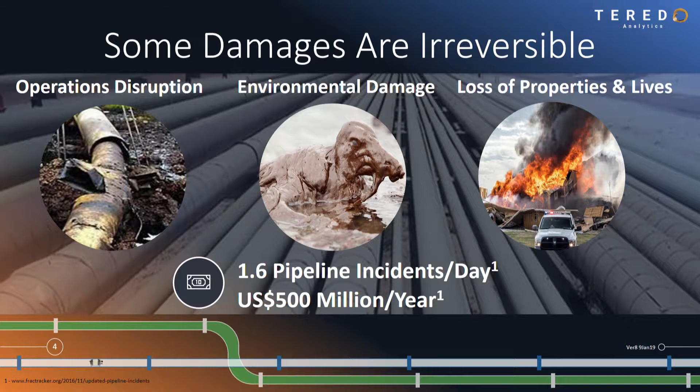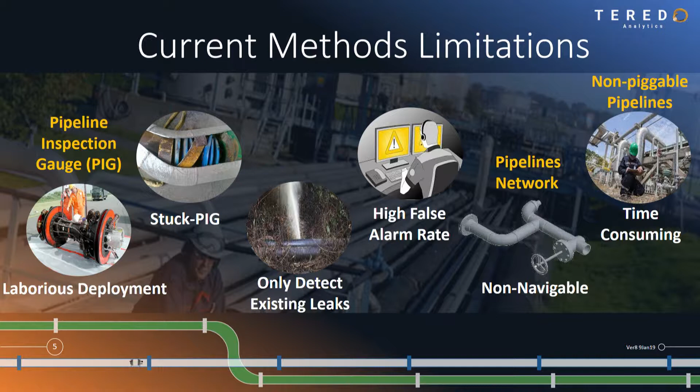As for non-piggable pipelines, which are small diameter pipelines, a safety inspector is tasked to walk along the entire length of the pipeline, which can be extremely time-consuming.

Now, the Teredo Observer serves to address all these current issues. Firstly, it is modularly designed for easy change of sensors to meet the customer's different requirements. In addition, different length arms can be attached to the Observer, so that it can traverse different pipeline diameters.

And once inside the pipeline, it can detect pipeline conditions using its onboard sensors. And lastly, of course, it can be pre-programmed to navigate to a designated pipeline for inspection. Now let's look at the operational capability of our Observer.

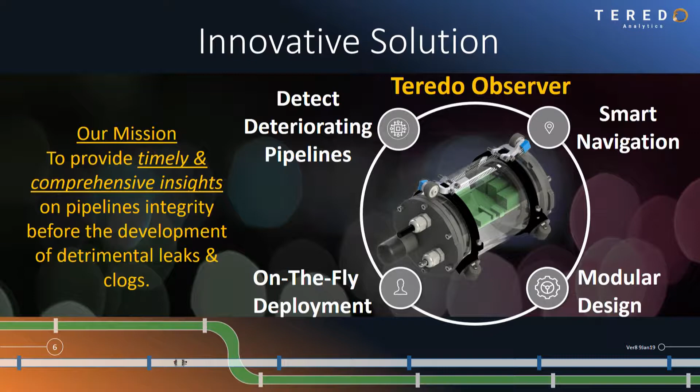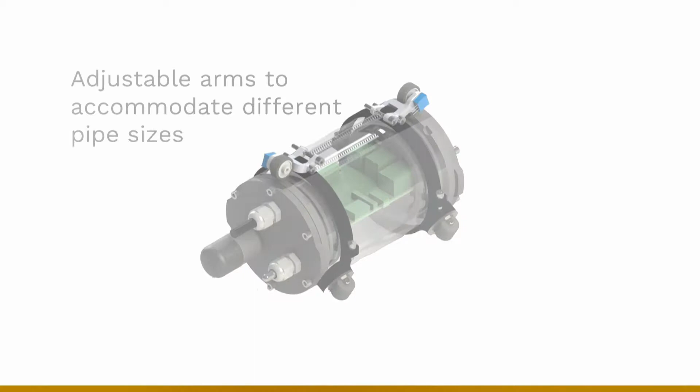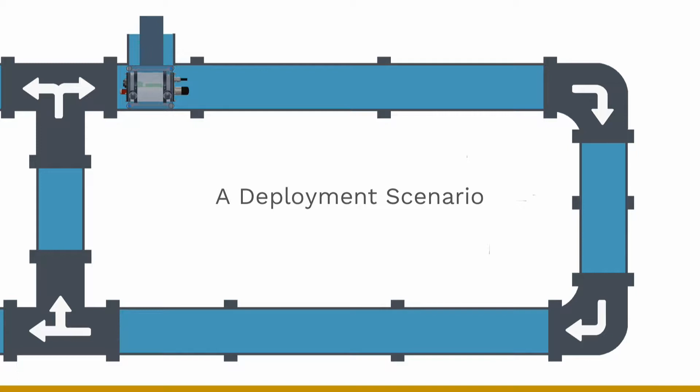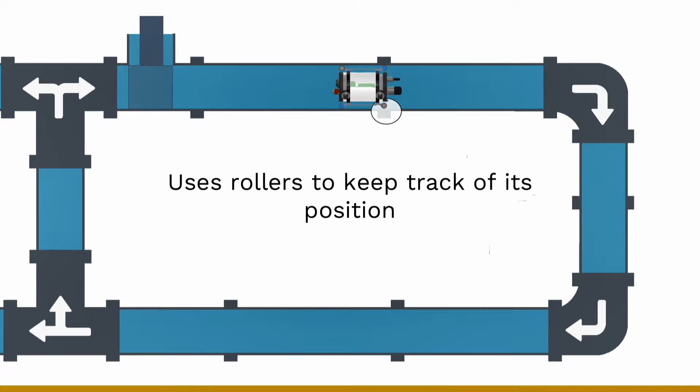Our device has adjustable arms to accommodate different pipe sizes. It also has the flexibility to attach different sensors to measure acoustics, pressure, and visual data. In a typical deployment scenario, the docking station receives the signal to release the device for pipeline inspection. During this pipeline inspection, the device tracks itself using the rollers installed onto it.

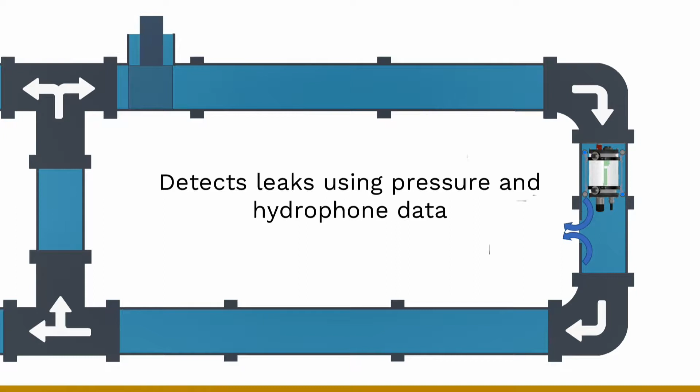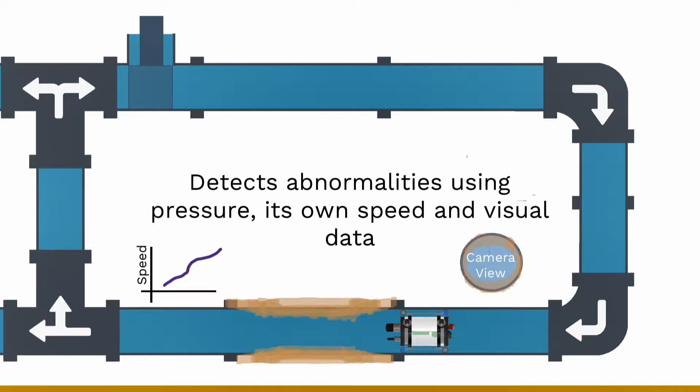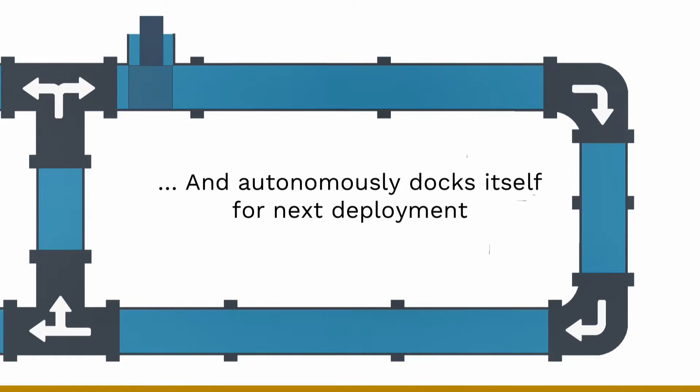Our device is also capable of detecting leaks using the pressure and hydrophone data it collects while traversing. It is also capable of detecting abnormalities using pressure, its own speed, as well as the visual information. Now, one of the unique features of our device is that it can autonomously travel to the designated pipes, and at the end of it, autonomously dock itself for the next deployment.

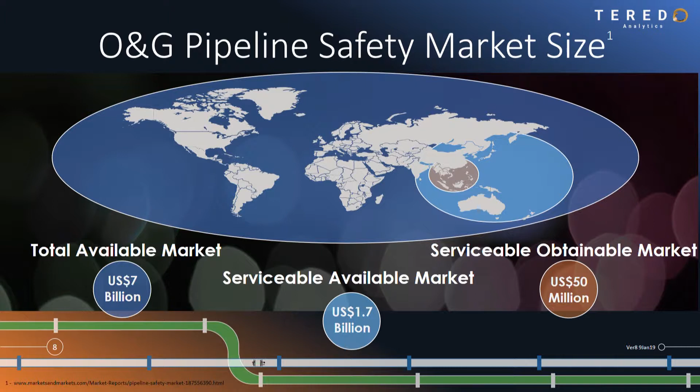Now, the current oil and gas pipeline safety market stands at US $7 billion. And the serviceable available market stands at $1.7 billion, which is in the Asia Pacific region. What Teredo Analytics targets is the serviceable obtainable market of $50 million US, which is small diameter pipelines, which are non-piggable at the moment.

So our business model will be based on a pipeline inspection package. It can be a monthly package to inspect a certain length of pipeline, or it can be project-based, or it can be an annual contract. The majority of effort will be put into pipeline data collection, followed by analysis report and pipeline product data collection.

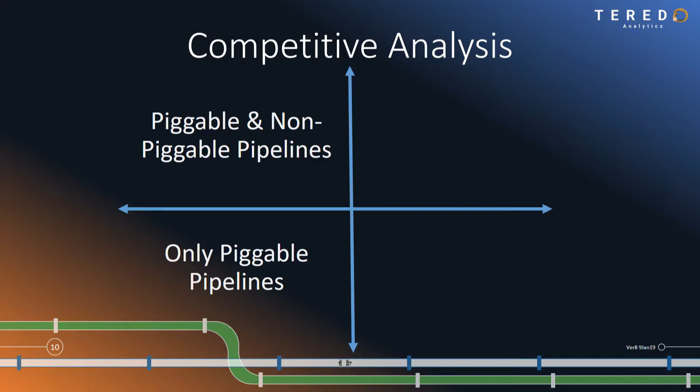Now let's look at our competitive landscape. So there are companies like Emerson and Rosen, which are only specialized in piggable pipelines, which are pipelines of large diameter. And there are companies like Pure Technologies that can put their device into non-piggable pipelines also. However, all these devices are non-navigable, and Teredo makes itself unique in the competitive landscape by having the autonomous navigation function.

So we have made a market survey, and there's a demand for our service in the water pipeline market too. And also due to its low barrier of entry, our first commercial customers will be from the water pipeline network. Following that, we'll tailor our device for the water pipeline network, and we have continued engagement with the oil and gas industry.

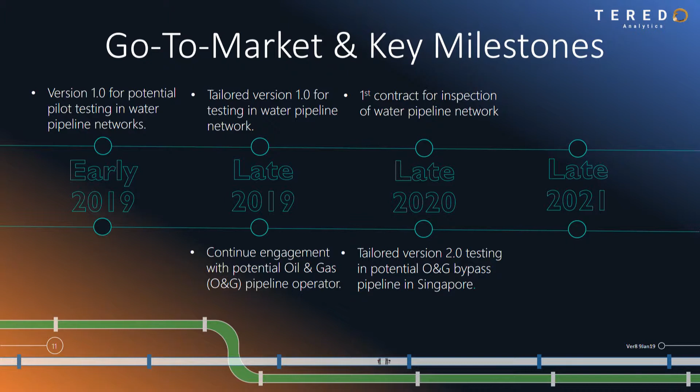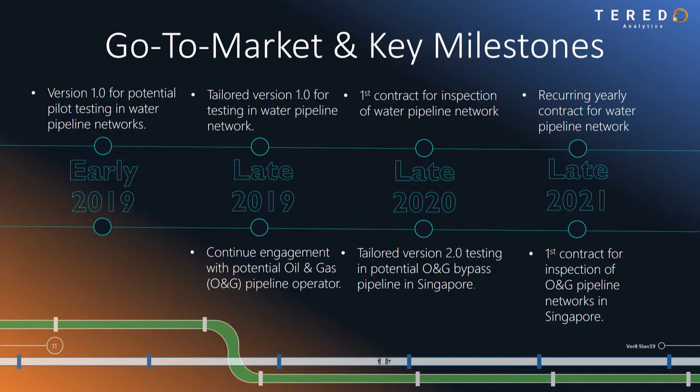And by the end of 2020, we will have finished our device for the water pipeline network, get our first contract, and start our development for the oil and gas device. And towards the end of 2021, we will have a recurring yearly contract for the water pipeline network, plus our first contract with oil and gas customers in Singapore.

So in year one, with all our funds gathered, we are confident that we can develop a device for the water market. And once we are in the market, with the recurring revenue generated, we use the money to develop our device for the oil and gas market. And for year three, all our effort will be to expand our services and marketing to the ASEAN region.

So I'm Liang Jie. I'm the co-founder of Teredo Analytics. I'll be in charge of business, machine learning, and image and data processing for the company. I'm currently working on a project with Kappa using acoustic data also, and we are assessing how much rare earth minerals there are on the seabed.

And he is Rajat. He's currently a PhD student, and his interest and his thesis is on robots in environmental monitoring. And the company is supported by Professor Mandar, who's the head of acoustic research, and Mr. Derek Lee, who has more than 15 years of experience in the oil and gas industry.